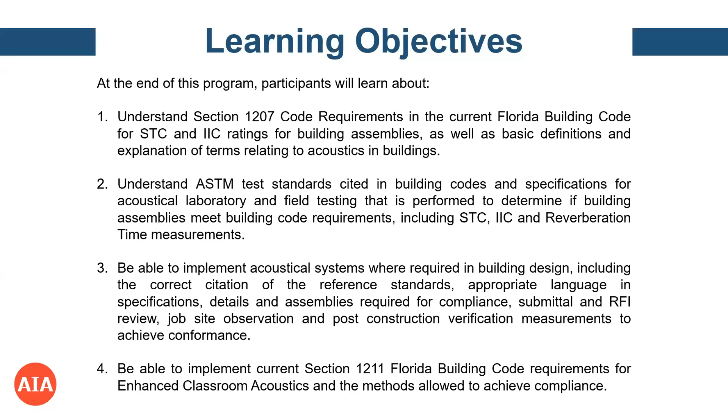So here we're actually going to start and look into section 1207 of the Florida Building Code. This is going to be our STC and IIC requirements that you may actually be a little familiar with or have seen before.

As we go through this next slide, we just want to look at the summary here. We have two different types of sound that we're dealing with: airborne sound and structure-borne sound. Airborne sound is what we think of when we think of a TV or a speaker, versus structure-borne sound, which is impact noise - somebody walking on the floor above, or dragging a chair or table. Those are the types of things we're going to be looking at for structure-borne or impact sounds.

With STC and IIC, the summary is STC 50 and IIC 50 in the lab, and a 45 rating in the field. For the field ratings, these are actually going to be called NNIC and AIIC for the specific metric, and we'll get into that a little bit later.

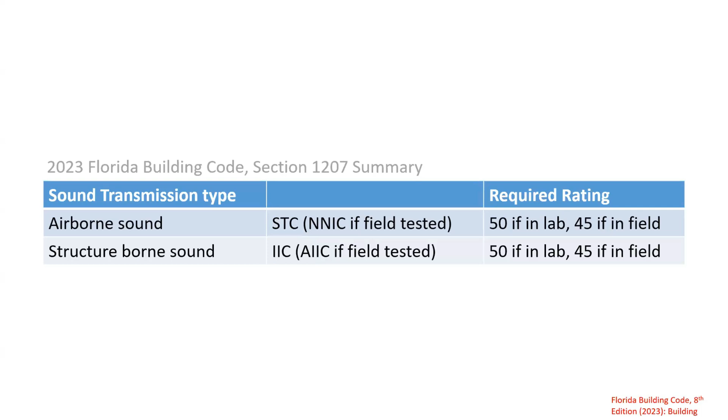So what does this code actually apply to? It's the walls and floor-ceiling assemblies of dwelling units and sleeping units. A dwelling unit is kind of your typical condo or apartment. You need to have the provisions for living, sleeping, eating, cooking, and sanitation, all of that.

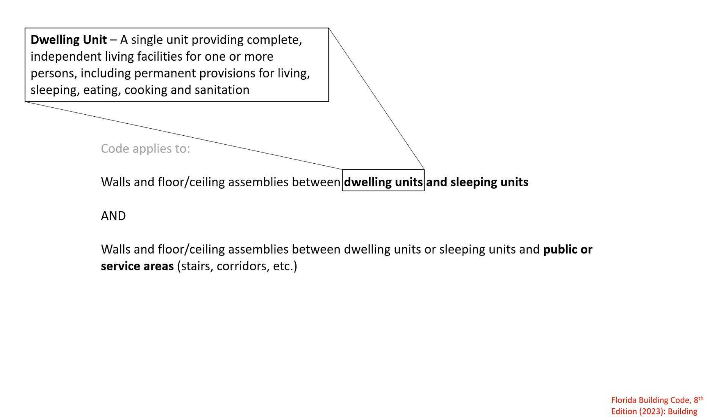Whereas a sleeping unit is going to be more like a hotel room or a motel room. The definition doesn't require quite every one of those facilities. But a sleeping room or a room within a dwelling unit is not in itself a sleeping unit. So if you have a bedroom in an apartment, that might be similar to a hotel room, but it's not its own sleeping unit - it's still just part of the larger dwelling unit.

So you don't need to look at the walls for the code requirement between different rooms in an apartment or condo. The walls and floor-ceiling assemblies between dwelling units, sleeping units, and public or service areas are also required to meet this criteria. This applies to amenity spaces you might have, whether it's a gym in your hotel or a mechanical room - these all still require this, even just to the corridors or breezeways.

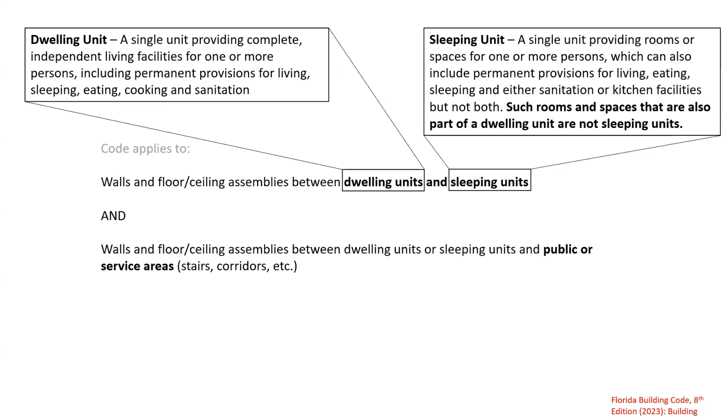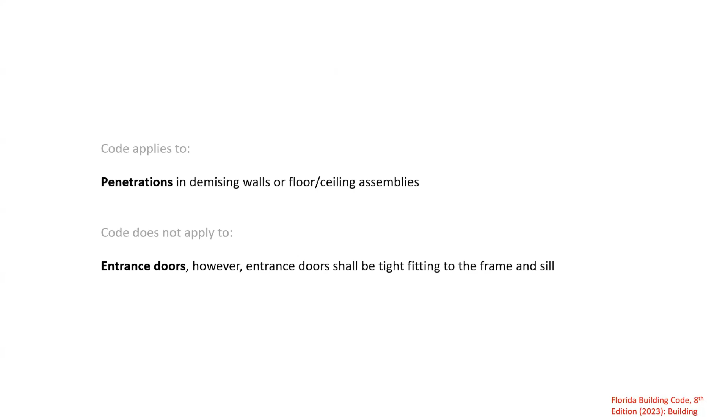It will also require us to look at the penetrations of these assemblies - so outlets or plumbing penetrations have to be made sure they maintain this criteria. The code, however, does not apply to entrance doors, so you don't need an STC rated door. However, it does state that you have to have a tight fitting door, tight to the frame and sill.

So we're going to go ahead and look at a little bit of the history of how this code has changed in Florida over the years. Starting with the 2004 Florida Building Code, when it was first introduced into the code in its current format, still the same section 1207.

At this time, it only applied to dwelling units, not sleeping units. The criteria was still STC and IIC 50 in the lab and 45 in the field - as we saw in that summary, it's still that same criteria. It called for ASTM E90 for airborne sound and ASTM E492 for the measurements of structure-borne sound.

Then in 2010, they added the provision that masonry can either be tested in accordance with ASTM E90, or you can actually calculate it using the Masonry Society's standard TMS 0302. We'll go through an example calculation of this shortly.

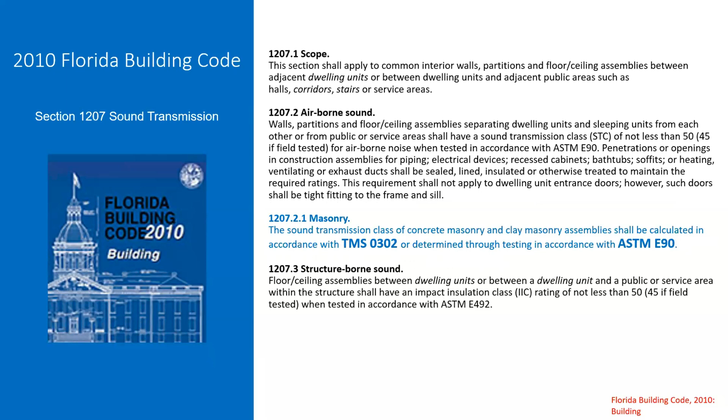Then the next change happened in 2017 when sleeping units were added into the code. So this is when hotel rooms, motel rooms, and things like that started to be required to follow this code - not just your typical apartments and condos that most people were focused on before. Otherwise, the rest of the changes were just to make it fit for adding in the sleeping units, not just dwelling units.

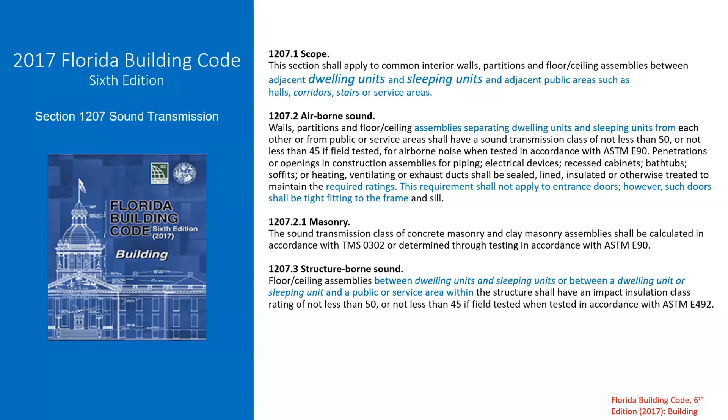Then in 2020, an engineering analysis was allowed in the code for airborne sound or structure-borne sound, rather than just the tested metrics of the field test or lab test. That was the addition in 2020.

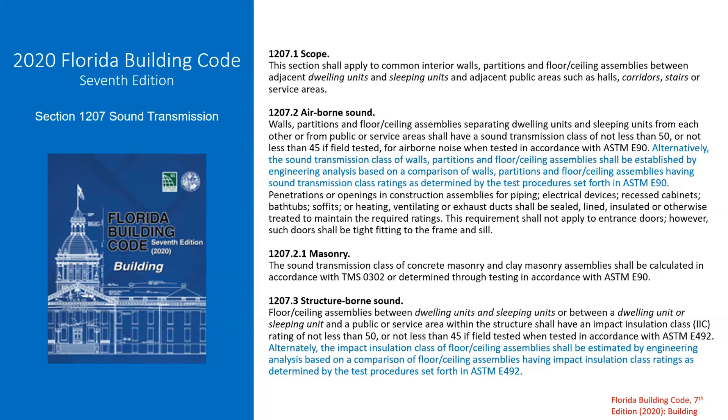And now we come to our current code, the 2023 Florida Building Code. The one thing that changed here is that all those previous times, it just said the lab test and field test, STC and IIC. Well, the metrics for a field test are actually called something different besides STC and IIC.

And there are 3 possible metrics for each of them, and they did not previously say which of the 3 you had to meet. So now they have specified what metric you can meet, because we were having people who might have a field test and could meet one but not another - so it's, well, do they meet the code or not if they're meeting one metric for field measurements versus another?

In this case, it's the normalized noise isolation class, or NNIC, for airborne sound - that's the field metric they're looking for, in comparison to the STC as the lab test. And for impact sound, instead of the IIC as the lab test, it is now the apparent impact insulation class, or AIIC, that is required to be met if you're looking at the field metric.

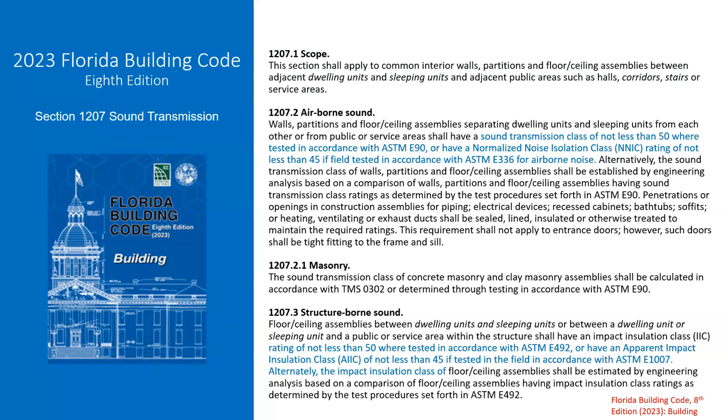As well as the standard building code, we also have the residential code in Florida. It's very similar, but it's an optional appendix, so it's not mandatory unless adopted by local ordinance. The ratings, instead of 50 in the lab and 45 in the field, are 45 in the lab and 42 in the field. This uses the same NNIC for airborne sound in the field metrics, but for structure-borne sound it uses the normalized impact sound rating, or NISR.

As we look at the reference standards in the residential code, we can see the years associated with these. The lab tests here, ASTM E90 and E492, have the last 2 digits after them showing the years those standards were adopted by ASTM. They've been modified since, but the reference standard for the Florida Building Code in this case is 2004 and 2009.

So we're seeing about 15 or 20 years old is how old they want us to look at. But we actually see test reports all the time from somebody who tested their wall or assembly or flooring assembly with underlayments, in some cases, more than 20 years ago—maybe 35 years ago. We might start to look at whether it needs a more recent test of that product, because over the years things have changed in how we test, and the quality of testing itself has changed with our instrumentation.

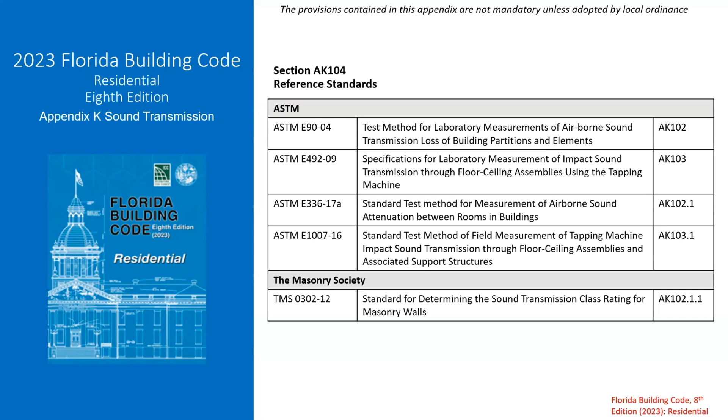So now we mention the Masonry Society standard 0302 for calculating the STC rating instead of doing a test. They give you different equations. Here we have for clay masonry at the top, and then concrete masonry, these two sets of equations. This is based off of the average assembly weight.

This is the surface weight of everything included in the wall, from the weight of the actual units themselves, any plaster, stucco, paint, grout, mortar—all of it, if the voids are filled, goes into it. But if there's gypsum board on the walls, that's not part of this weight. It's just the assembly of the masonry and the associated items for that.

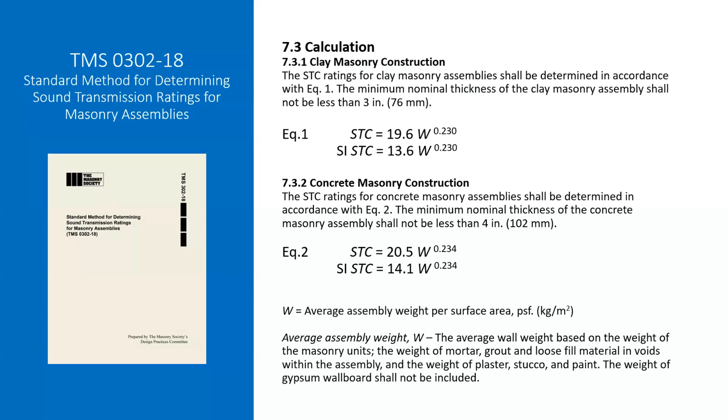There are calculations to include additional gypsum board in this and other equations. Actually, we're starting to see some of these equations to add gypsum board are based only for concrete masonry. They don't actually have it for clay masonry.

This is based off of 1/2 inch or 5/8 inch thick gypsum board. There are a couple of different equations, whether it's on one side or both sides of the wall assembly, and whether or not there's sound absorbent material inside the cavity or no sound absorbent material in those cavities.

So the things we're looking at here are the thickness of that cavity space or furring space between the block wall and the gypsum board. If you have 2x furring on the wall, that's going to be 1.5 inch space. If it's 1x, maybe you have that 3/4 inch space. Then it would be these equations here, whether it's on one or both sides with no sound absorbent material.

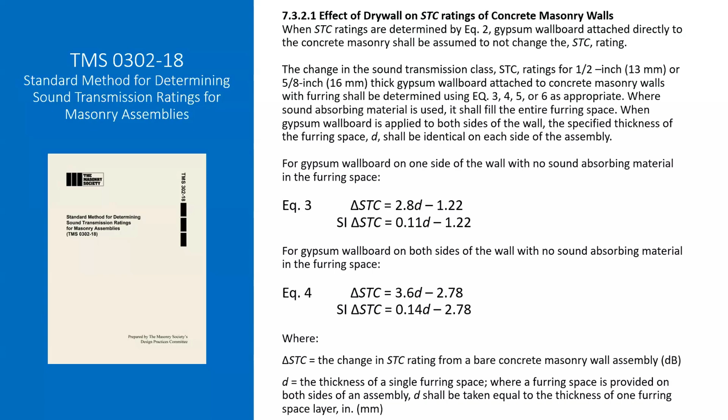On this next slide, we have the equations for if it does have sound absorbent material, like fiberglass batt insulation, inside that cavity.

You can also do multi-wythe masonry construction by doing the composite assembly, or the total weight of all of the wythes, using one of those first equations—1 or 2, whether it's concrete or clay masonry. Those first couple of equations look at that weight based on the entire assembly for both wythes or multiple wythes, if more than 2 even.

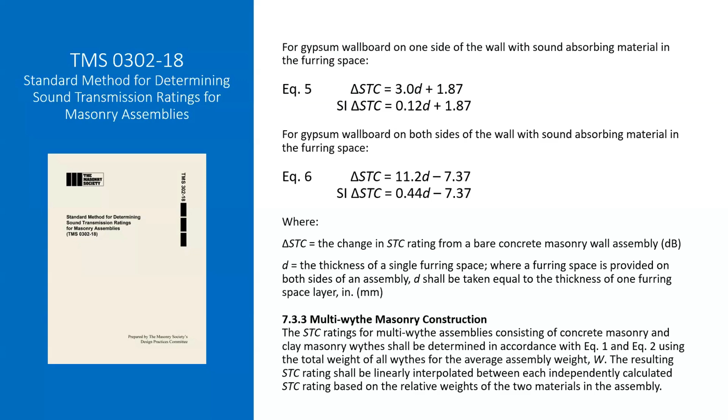So we're going to go ahead and take an example calculation here. We've got our 8-inch nominal block at 41 pounds per square foot, which is about a typical normal weight block. Next slide.

So we find our equation. This is the equation for concrete block. And we also have our equation down here for adding gypsum board on one side of this with a 1.5 inch airspace. So say we have 2x furring and some fiberglass batts in the cavity.

Next slide. So we take our 41 pounds per square foot and add that into our equation, and then we calculate that out. Next. So just our block itself gets about that 48.9 STC rating.

So now when we look through the next side of the equation, adding the gypsum board, we take our dimension here, our 1.5 inches, and we solve out this side of the equation. That's our delta rating, and this is going to give us an increase of 6.4. So then we take both of these and add them together, and we get our rating for our wall of 55.3, or in this case, STC 55.

So taking this normal weight block and adding furring on one side with batt insulation and gypsum board, we could use this wall, but we couldn't use the wall without this furring because we weren't quite meeting the 50.

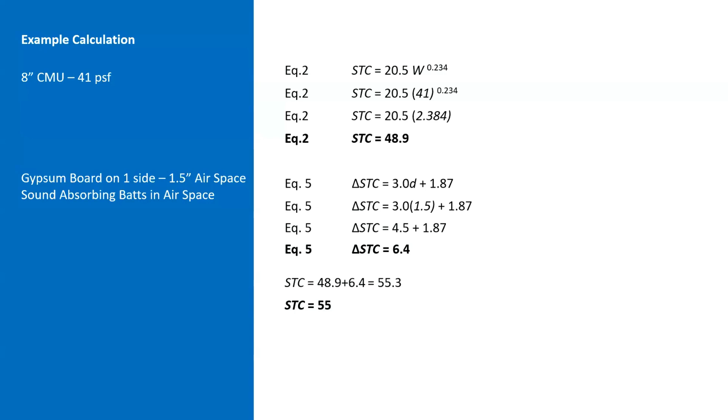Thanks, Matt. So Matt's been talking about STC, and we're going to zoom out a little bit more now and look at some other aspects of it.

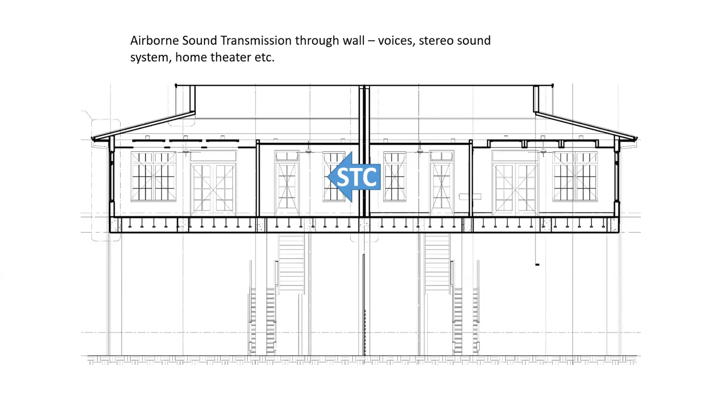Maybe something to consider might be the fact that we also get sounds that flank through the ceiling, over the wall, and back into the other unit. Same sort of path here through the doors. Sounds can leak under the floor ceiling assemblies if they're elevated, like shown here.

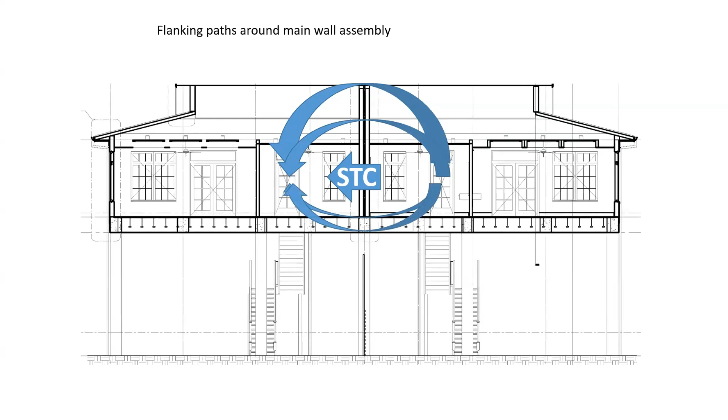And so what ends up happening, even through windows, is that you have a space that you're trying to look at and analyze the STC rating of. We may think of just the wall, but in reality, and I'm not sure if you can see my pointer, hopefully you can, we really need to be looking at all of these sound paths. In acoustics, these are what are called flanking sound paths.

Anywhere where there's a joint or a juncture between two planes, we need to take a look at that, because if we have a nice, robust wall between two spaces, well, that's great. But if we don't look at all of the details where these come together, then you could have flanking sound go right through those areas of least resistance.

And sometimes the flanking noise can decrease the STC performance by 5 or even 10 points. So you may think that you have an assembly that meets building code, but if it's in a certain situation like this, where there are many, many paths of potential flanking, you could be out of compliance if you did field testing.

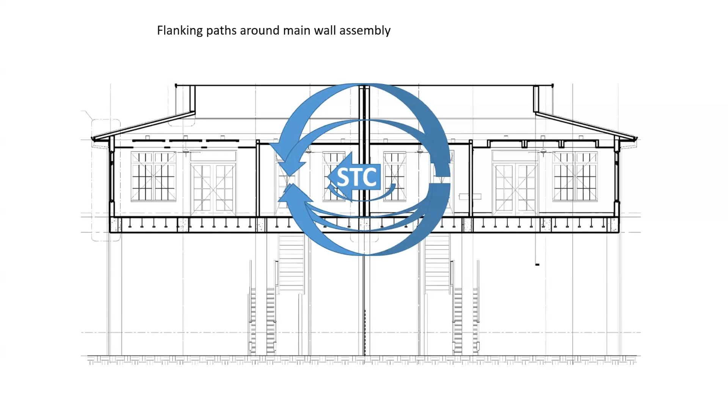So this is just to get you thinking about the idea that STC is not just in one dimension or two dimensions. When we think about STC, we really need to be thinking about the entire box, the entire structure of the floor, the walls, the ceiling, so that we're addressing all of these potential paths that could decrease our performance.

When we look at STC, what is STC? Well, it's basically a single number rating system of how well a building partition reduces sound from one side to the other. And it takes into account sounds that range from 125 hertz to 4,000 hertz.

But if we think about this in terms of human hearing, human ears hear from about 20 hertz to 20,000 hertz. So what the STC rating really is doing is looking at the frequencies that are more in the middle to middle-higher range, but it's not looking at the very high and it's not looking at the very low. That's something to keep in mind as you start to think about this and as you're comparing one assembly to another. You could have numbers that appear to be similar, but they could have very different acoustic performance.

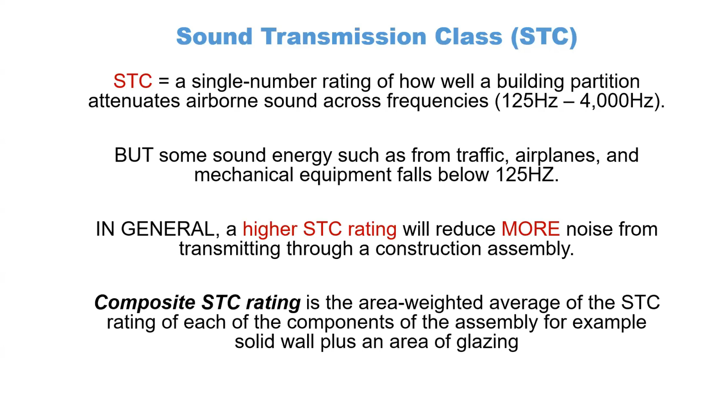We also look at the concept of composite STC ratings, where basically if you have an entire wall that has a door and a window and a wall structure, you're going to have separate STC ratings for each of those components. But you can also calculate a composite STC rating of the entire structure that allows you to account for the area of the wall, the area of the window, and the area of the door, so that you can more effectively understand how your full assembly might work.

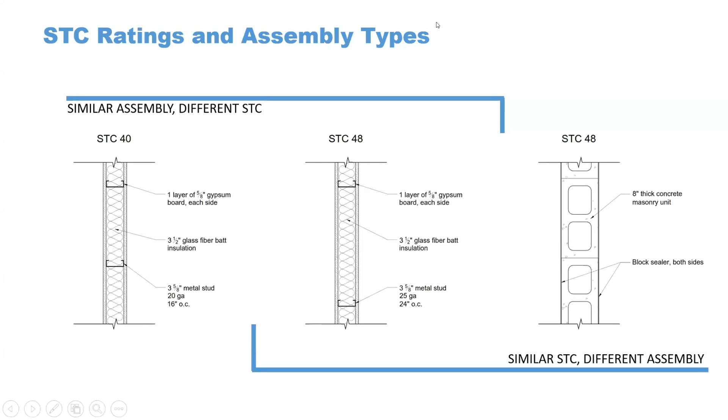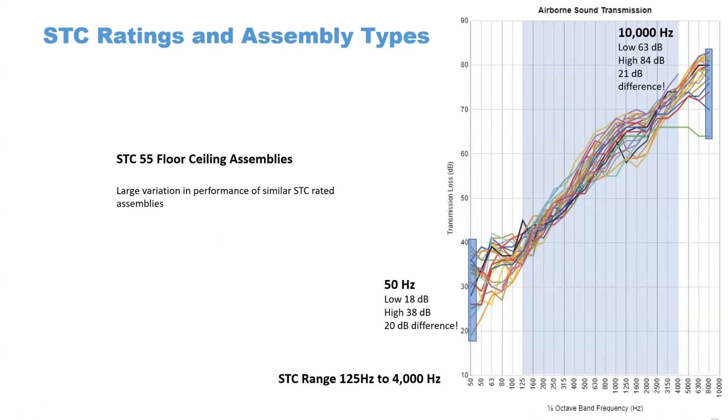So looking at how STC is actually tested, we've got a way that ASTM describes in standard E90, where you have the setup in a lab, and we test for sound transmission in a lab.

But you can also do this in the field, and this is commonly done. The standard that governs that is ASTM E336. That is done many times in multifamily housing. If there's any question about building code compliance or whatnot that comes up, these can be done in the field so that you can actually measure the acoustic performance of a building.

When we do this testing, we start off and have a sound source in one room, we call it the source room. The sound source is played at a high level, usually around 100 dB or so, and it is measured in the source room so that you know exactly how loud the sound is there. Then we also measure in the receiving room, with multiple measurement locations, so that you are able to get an average sound level of how much sound is being reduced by the assembly you are trying to test.

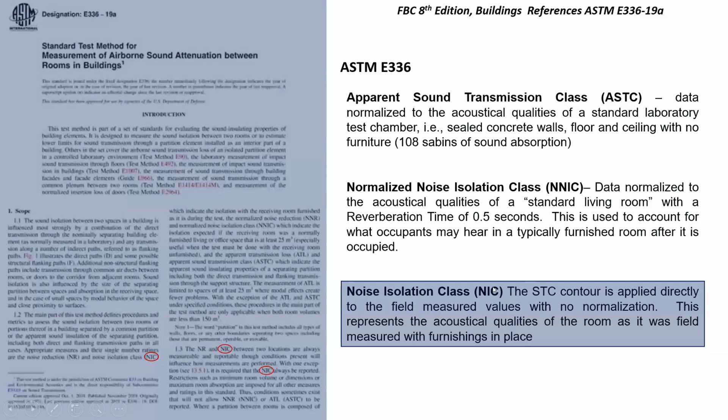Exactly. And like Matt was saying, anecdotally we have seen a number of cases where if we're kind of borderline with one or more of these in the field, one may be over the requirement for the building code and one may be under. There have been a number of cases we've been involved with where, when you're straddling this line of whether you were in compliance or not, it was difficult before because none of these were actually specified. Now it's specified, now it's the NIC, so it makes things a little more clear cut.

And just to hit the point home, we want to make sure that the STC is not confused with an IIC. An IIC is impact insulation class, that's for impact sounds. But it is not the same thing as sound transmission class, because sound transmission class is airborne.

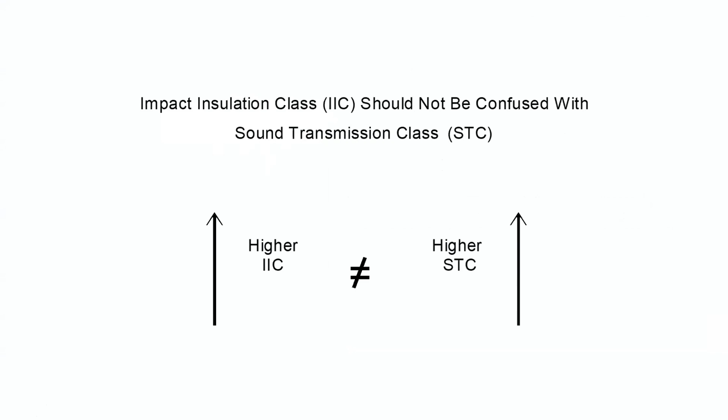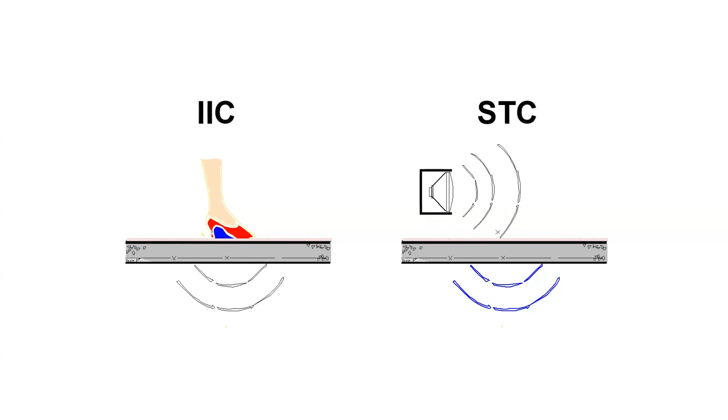Just a visual here, STC is airborne. So airborne sound coming from a speaker goes through the building assembly and radiates down into the room below. Whereas impact sounds come from the impact of a heel or of furniture scraping the floor, and that sound is radiated through the building structure and is heard audibly below. Different types of sounds, and they are measured differently in the building code and in acoustics in general.

So we're going to talk a little bit more. Matt's going to take it over, and he's going to talk a little bit about the impact insulation class.

So as Keely was just saying, and we've mentioned a little bit before, the IIC, or impact insulation class, as it states in the name, is impact noises, impact sounds. So whether this is somebody walking across the floor, kids upstairs running around, moving some furniture and it's dragging a bit, you drop things in your kitchen, a plate or a pot or pan, things like that—these are the types of sounds that cause impact sounds. Airborne sounds are sounds that start in the air and then hit the building surfaces, whereas impact sounds start as something impacts into that building surface.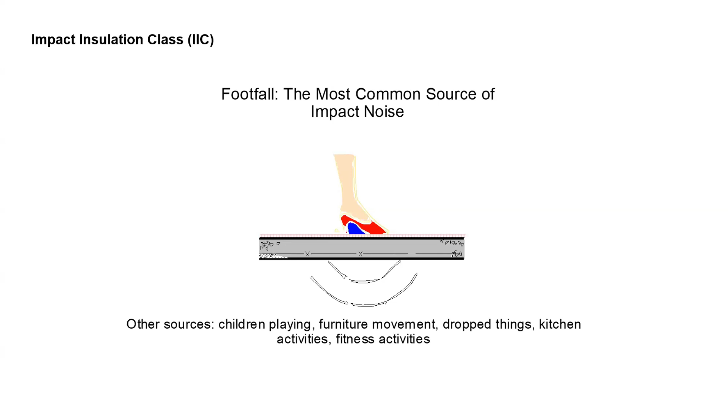A higher IIC number will mean that there is a lower amount of impact sound that is transmitted. So we have less sound being transmitted into the space below, and this gives us a higher IIC. A higher IIC is typically preferred in this case, it's an improvement in performance.

Similar to the STC, we can see here a variety of floor assemblies that have, in this case, an IIC of 55, and we have again a wide range of sound levels here. In the low frequency, we're looking at a 25 decibel difference in some frequencies, and in the high frequency, as much as 35 decibels in some of these cases. This range is slightly shifted, it's actually moved a third octave band down from what the STC criteria is, so this goes from 100 hertz to 3150 hertz.

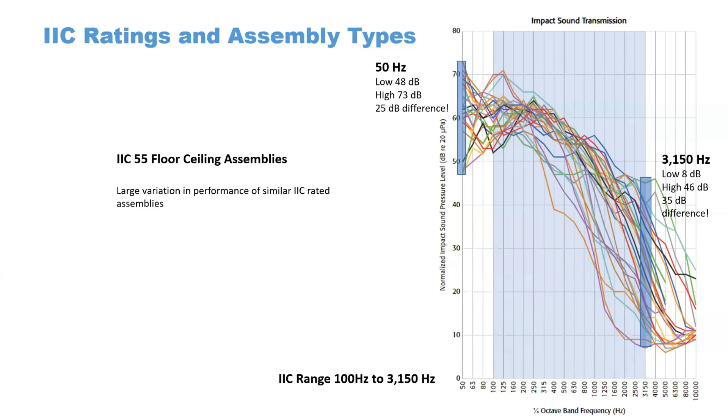Similar to the STC, we have our lab test and our field test. Our lab test in this case, you can see this concrete room with a floor in the middle of it, and this machine sitting on the floor is called a tapping machine. We'll explain more about the machine later, but the standard test method for the lab is ASTM E492. And for the field, again same machine, but we're out in the field and we have the standard ASTM E1007.

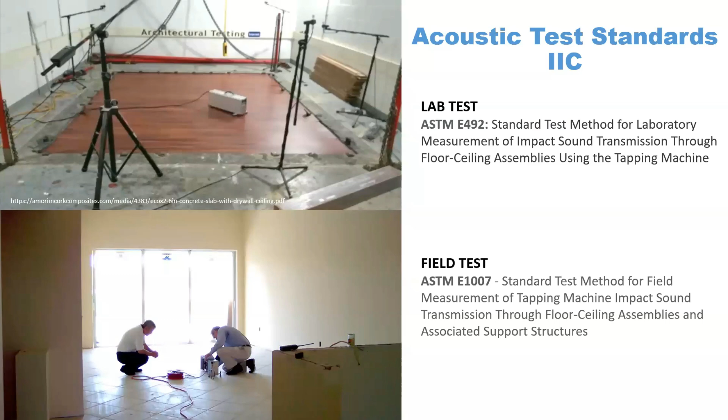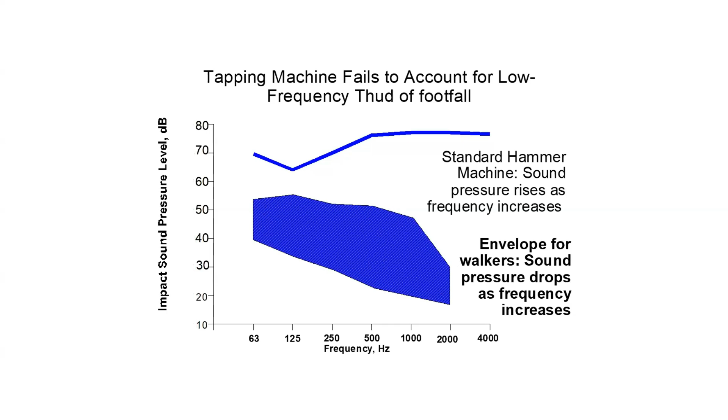The tapping machine doesn't actually mimic the sound of a human foot. It's not meant to be the same as a footfall. We can see here that the hammers hitting the floor from the tapping machine create this line above, and the sound pressure rises as frequency increases. Whereas this larger shaded blue area below is more what we see for an actual human walker on this space. As frequency increases, the sound pressure level decreases in this case, and we see a decent bit of change between them.

The yellow or orange color here is an IIC between 43 and 45 for the floor ceiling assembly, and the blue is about a 52 or 55. So they're about a 10 IIC point difference, and we can see the sound levels between them are about 10 decibels different as well, which is heard as twice as loud.

Now the ambient sound level we're seeing down here, and actually this isn't from the tapping machine, these are footfalls from somebody actually walking on these different floor assemblies. The ambient sound level, kind of the bottom of these peaks where sound would be if someone wasn't walking, we're still seeing, even with the IIC of 52 or 55 which is above code minimum, stuff that's 10 or 15 decibels above that. So that's noticeably louder, actually twice as loud to three times as loud as when there's not someone walking on that floor assembly. This is something someone would just notice, someone walking above, even if you're doing better than code minimum in this case.

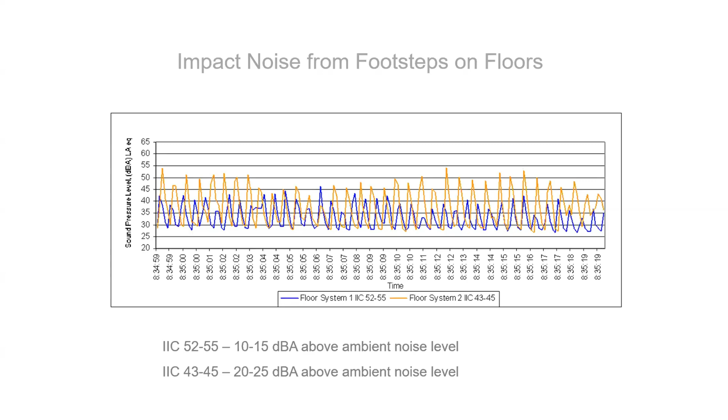Exactly. Code minimum does not mean inaudible. It does not mean soundproof. It just means you're meeting the code minimum. And many of the luxury or ultra luxury residences we work on for multifamily go above and beyond code minimum, very much so. And soundproof is not a term you probably want to use in any of these, depending upon what sounds -- there's all sorts of things.

We mentioned the tapping machine, and this is kind of an image of what that is. There are five hammerheads, basically steel hammers on a camshaft that rotates so there is a rate of fall of 10 impacts per second. As we said, this is not anything close to what a person walking would be. It's meant to be loud enough that we can hear it below even in larger assemblies, or assemblies that perform better. We still want to be able to hear these impacts through those so we can measure how well it performs. So this is an even larger impact than what you might normally have -- if you're having this happen all the time on your floor, there might be other issues.

But this is used both in the lab test and the field test. It's the same piece of equipment that's used for either.

So we take the tapping machine and it's put typically on the upper floor, and then the measurements are taken down below in the receiving room. In this case you don't actually have a sound level measurement on the upper floor because it's a set kind of impact, a set rate of fall. It's meant to create a standardized impact, so you're only actually measuring it in the receiver room. The receiving room can be, and is typically, worse when it's directly below -- that's typically your worst case scenario.

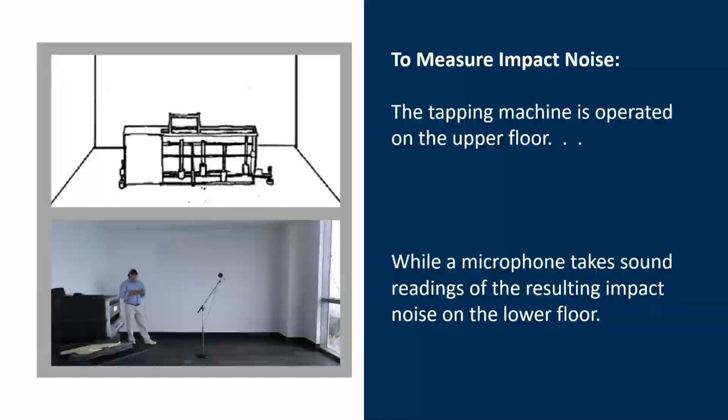So we're going to look at something very similar to the STC, which is the IIC. This has three metrics, and this is for field measures. First off, we have the apparent impact insulation class, which similarly is sealed concrete walls, no furniture. It's meant to normalize this to be similar to the lab test chamber.

Then we go to the next one, the NISR, the normalized impact sound rating. This is normalized to the standardized living room with a half-second reverberation time. While we said that for STC this normalized, middle metric was the one that code requires, for impact sound Florida has decided to use the AIIC, the first one we talked about, as its code requirement.

This does differ from the International Code Council's criteria. So the Florida Building Code and the International Building Code do differ on this, if you are working in other states or other jurisdictions as well.

And then third is the ISR. Again, this is just the levels exactly as they were measured. It's not adjusting for any reverberation time in the room, it's just how that specific room performs.

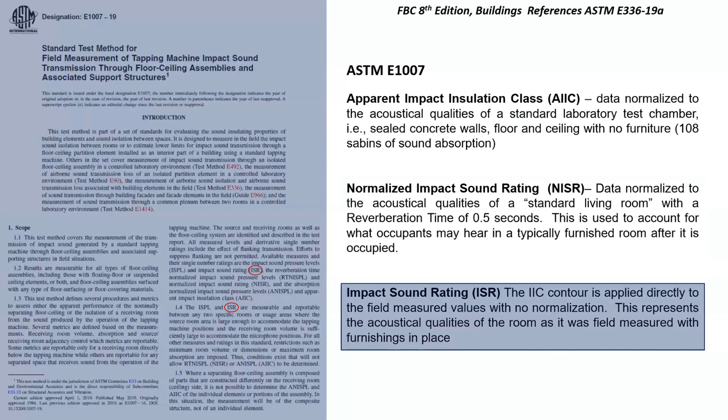We talked about some adjustments that have to be made typically for absorption in the room, but there are other reasons why we may have to make adjustments to a room. One of those is also the ambient noise or background sound level when we do measurements, and this is for both airborne sound and impact sound.

We want our receiving room levels from whatever source we're trying to measure to be at least 10 decibels above the ambient sound. If not, if it's closer than that, then we have to apply correction factors. And if it does have correction factors, that can limit how much performance we can state that assembly has, because we can only measure up to that performance.

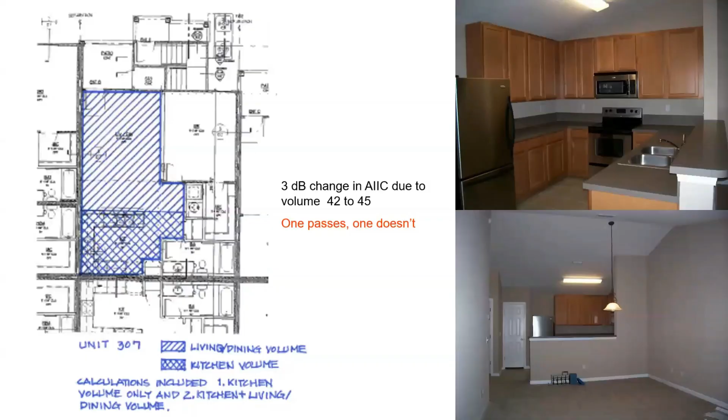As well, we have what's called coupled volumes. We were talking about these minimum and maximum volume requirements. Well, what if we have a space like this and we're looking to test the tile floor in this kitchen down to the unit below? Now we've got a relatively large volume there. Are we looking at just the kitchen volume, or the whole great room volume? This is a real scenario we've had.

One of these volumes, based on it and the adjustments needed, would pass the criteria just at 45 per the building code, and one of them did not, and was actually 3 decibels lower, or 3 IIC points lower. So in some scenarios it really is about trying to find out what volume to use, what's that coupled volume. The ASTM standard does call out typical spaces for coupled volumes, whether they are or aren't, based on certain dimension requirements and relationships to the space. But not everything is as clear cut in the field as the standard suggests.

So a quick summary of some design criteria as well, and the various code requirements. We've talked before, the STC and IIC 50 for a lab test is in the Florida Building Code 8th edition. It's also in the International Building Code at the same level.

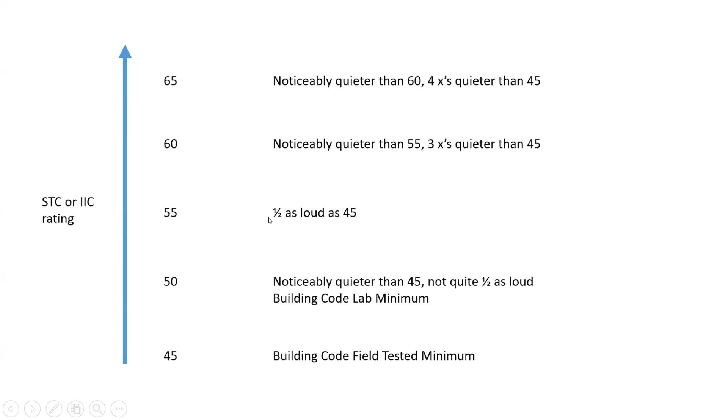Again, just because you meet code doesn't mean people don't complain or still hear this. Based on a study, if you're at an IIC of 30 to 40, which is lower than code, a lot of people are hearing the footsteps above and are bothered by them. If we go over to 50 to 60—meeting code up to the edge of the acceptable/preferred recommendations from the ICC guideline for acoustics—still about 30% of people are hearing those footsteps above from these assemblies.

About 8% or so are still bothered by them. As we go higher and higher, we still have people who hear these and who are still bothered. Code minimum is good to know, and sometimes that's what you've got to work to, but it is not recommended—you will still get complaints. It's just good to know people are still bothered by these, and sound is one of the biggest complaints you can see in multifamily housing.

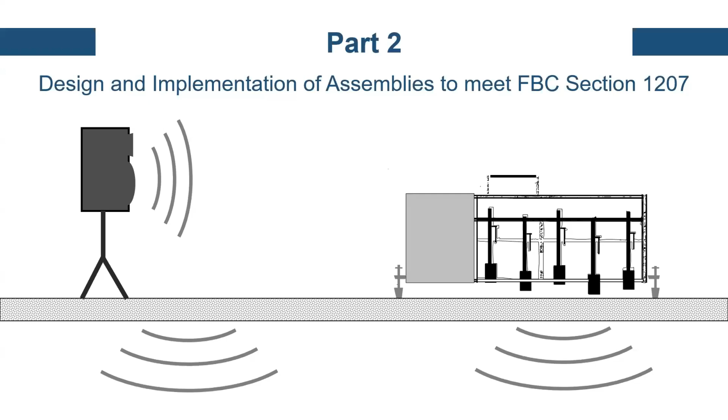So part 2, we're going to look at the design and implementation of assemblies to meet the Florida Building Code, and how they can get implemented in projects. So what are ways that you can achieve a higher IIC? Well, one way we just mentioned is, of course, carpeting. Though not every space can be carpeted, and most of the time nowadays, especially in residential, people are not wanting to necessarily go the carpeting route anymore. However, it does do a good job at improving the IIC.

And nowadays with all of these condos changing out carpet for other types of hard reflective material, there are issues. So what are some other ways that we can deal with it?

Well, one is floating floors. Floating floors can help to increase the IIC performance, but they can get a little costly. They do take up a lot of space. And if you have a renovation, it can be kind of difficult to accommodate a floating floor, although they are very effective. Floating floors are typically used in places that need...

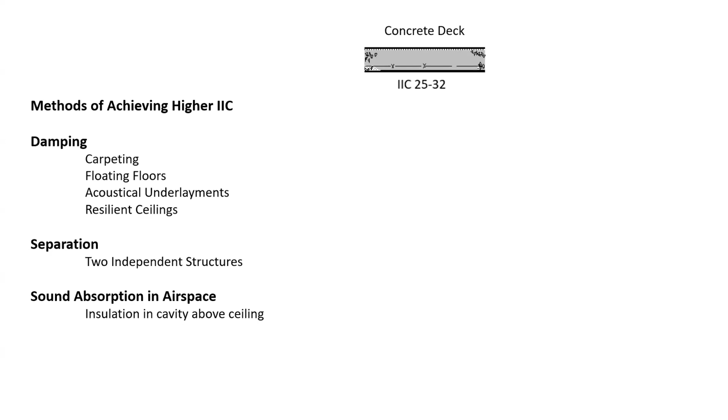Oh, thank you, I forgot about that. Sorry, floating floor - I forgot to advance the slides.

Floating floors like this - again, when we're talking floating floors here, we're talking usually these thicker concrete floated floors or a multi-layer plywood build up on top of resilient isolators. This isn't just your typical laminate floor or vinyl floor installed as a floating installation - though that does still have some minor improvements. These are something you might see more around a fitness center or a mechanical room, or in a recording studio, someplace where there's sensitive acoustics.

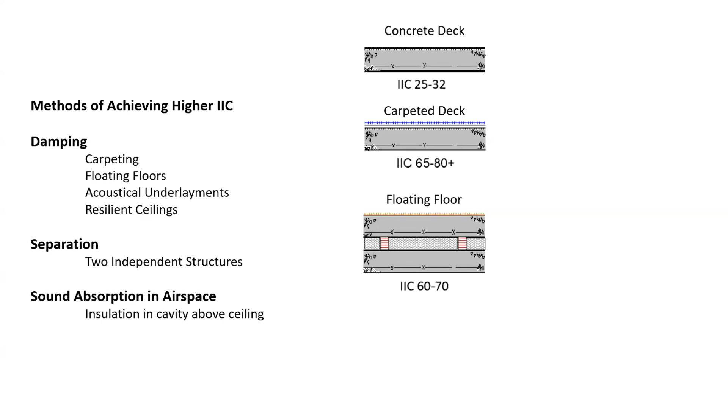And even with this, we can see that the IIC rating is getting close to, but not even always where carpet can be, because of how the IIC tests are performed. Carpet does perform very well based on the frequencies that it's at as well - even if you might still hear somebody's foot on the carpet, you might not hear it with a concrete floated floor. And again, as Keely was saying, we can't have carpet just everywhere, even if we want to.

I mean, I don't know anyone really that wants carpet in their bathroom per se - not anymore. So you're going to have a hard surface floor in something like this at times. So we do need to look at other options like these.

What we see is very common is tile underlayments. Whether it's for tile or for other hard surface floors like wood floors or luxury vinyl floors, we see both these very thin underlayments and the kind of thicker underlayments. The thin underlayments might be only a few mil - I think some are 90 mils thick, and a mil is a thousandth of an inch. Versus these thicker underlayments, we're looking at greater than a quarter inch - a quarter inch, a half inch underlayment for some of these thicker ones, depending upon the finish and the rating that we're trying to get and the base assembly.

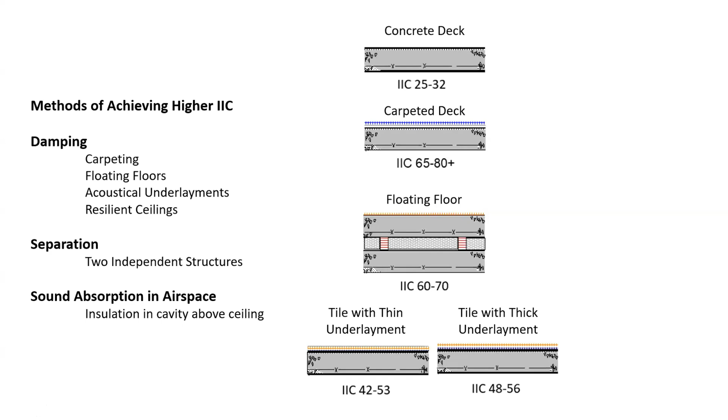All of these values being shown here are based on the concrete slab assembly, which is what's in Florida. We see a lot of these in condos and in hotels, these concrete slab assemblies, so it's something we see a lot more of. But the concepts still work for wood assemblies, though the values would differ.

So, moving on to other ways of helping achieve higher IICs are resilient ceilings. Whether we use a system that includes a wire tie, or if we use special acoustic isolators, we can get varying degrees of acoustic performance just from having a suspended ceiling below the slab. It's a very significant way to improve the acoustic performance, and an option that many people look at.

Then we can layer these systems and take a concrete slab and have the acoustic spring hung ceiling, and then also either thin underlayment and tile or thick underlayment. So you can improve even further the acoustic performance by layering the acoustic systems.

You have to be careful because each of these systems has an IIC rating in and of itself. And when you start layering them together, they are not additive, meaning the IIC ratings are for an assembly as a whole.

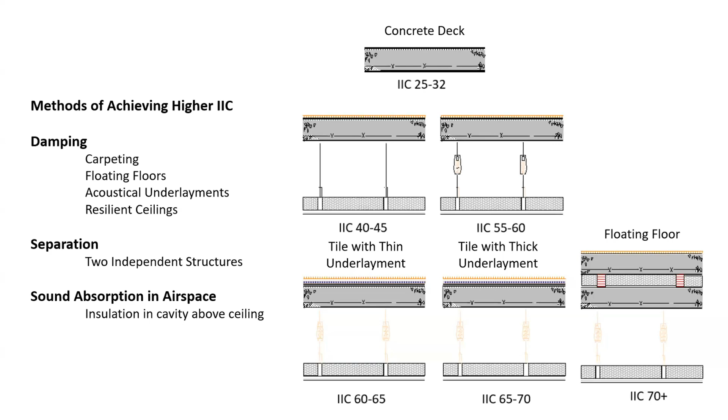Insulation in those cavities is also preferred to help improve these values. Some of these things can help with both the STC and IIC, like the sound isolation ceilings, but the tile floor underlayments or hard surface floor underlayments won't necessarily help with your STC rating, but they will with the IIC. Another thing we need to look at is how the little details occur, where the junctions are in this case.

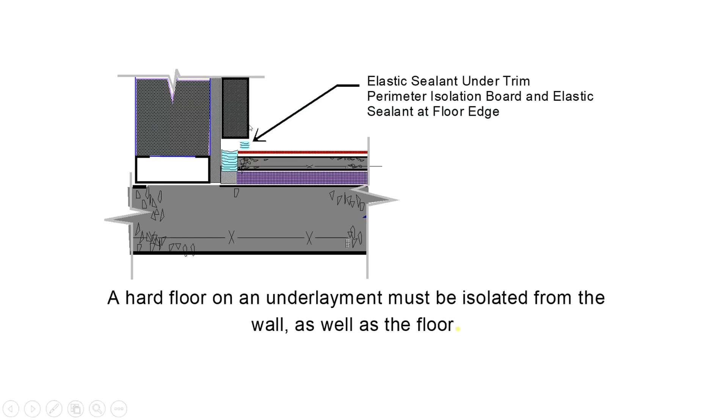So in this case, if we have the hard surface floor on, say, an underlayment, we're going to look at the sealant at the edge of the wall and under the baseboard. We want to make sure that all of the acoustic systems are resiliently isolated from each other, because if these components were touching each other, they would allow for structure-borne vibration to occur. That's why the floor isn't touching the wall, isn't touching the gypboard. All of these pieces have to be structurally isolated from each other so that you get those resilient layers to help dampen some of that structure-borne vibration that gets into the assemblies.

So let's say we've got two different underlayments, we're going to call it underlayment XYZ and underlayment ABC. We have an IIC rating of 50 to 55 with the one, but it seems to be a little more costly. Another we see has an IIC rating of 60 to 70, but seems to be a bit more affordable of an option. I probably can't really see this when I ask this question, but how many of you would go with underlayment XYZ over underlayment ABC?

Well, now if we look at a little more information, we see how these two underlayments were tested. Underlayment XYZ here was tested just on the bare concrete slab and got that 50 to 55. Whereas ABC was tested with a full spring hung ceiling system below to get this higher rating. That might help explain why we're seeing some differences, and you can't really just compare these apples to apples because they're not apples to apples in this case. So it's one of those things that has to be looked into, the claim from the manufacturer that my underlayment gets this rating has to be examined further to see if you're really getting what you need. Again, it's the assembly as a whole that is rated, not a product.

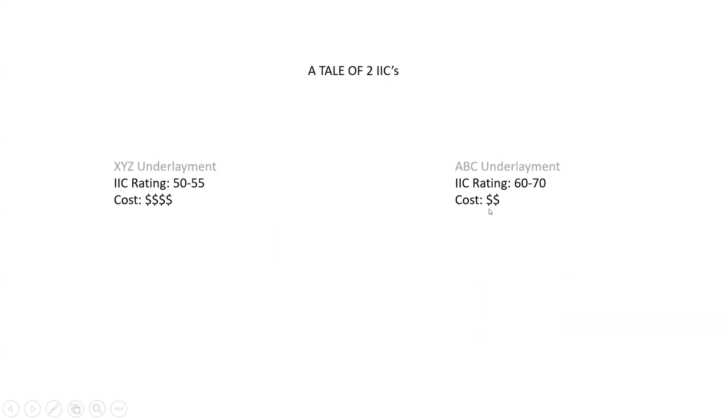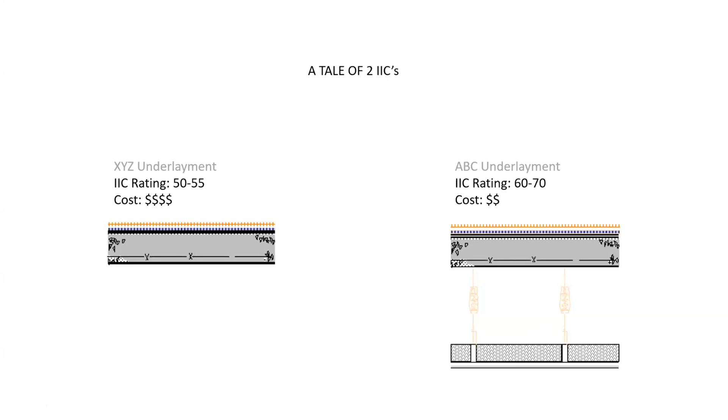This may seem kind of far-fetched, like we've got these two underlayments, one really expensive and one not. But the way they're tested, one of them has a complete isolated ceiling, where the ceiling is doing a lot of the heavy lifting and is the reason why the IIC rating is so high. You wouldn't necessarily know that just from looking at the IIC ratings when one is 70 and one is 55. So just something to think about, be aware of, that this has to be looked at when you're looking at the actual acoustic performance of various underlayments.

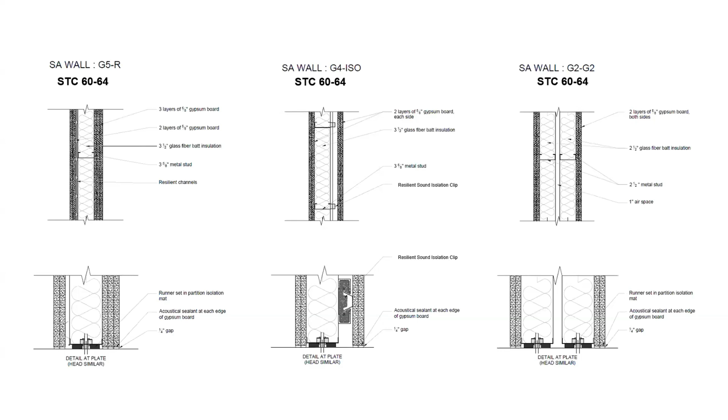And again, with block wall, we've talked about this kind of nominal 8-inch block wall before. It's in that mid 40s range, the 44 to 48, depending on the weight of the block that you have. But if we take that same wall, add a little bit of an airspace and separate framing, just insulation - it can be just glass fiber batt insulation, 1 layer of gypboard - we're up to 60 to 65 as our STC rating. So it's a big improvement.

It's again similar to those double stud wall and isolation clip walls we were just looking at for the STC rating. But again, because of that mass from the block and the masonry, we're going to reduce more low frequency sound in this case. And at least in this case, we have on one side a gypboard finish, if that's what we're looking for.

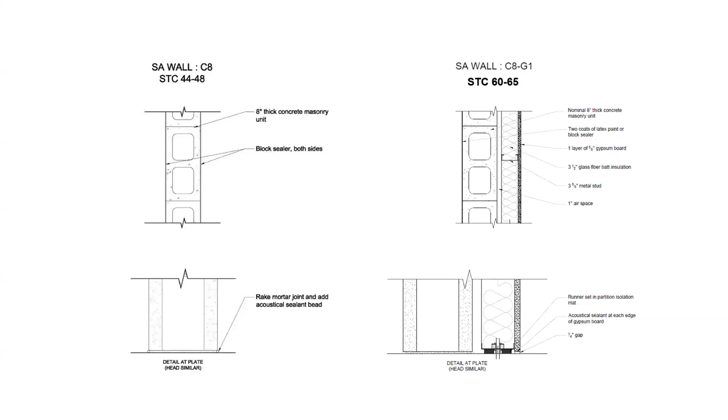So, when we're looking at all this, you might think, well, there ought to be a standard. Well, there actually is a standard. But just a couple of things to think about: you can't necessarily rely on just the manufacturer's cut sheets or websites with just the single line IIC test result. You want to try to dig a little deeper if possible and get the full acoustic test report, and make sure that it is done by an accredited lab.

And make sure that it's the full document. We'll go over a little bit more on this. But there are some things we have seen - sometimes information sent from a manufacturer has multiple pages from different labs. Back in the olden days, I have actually seen whiteout on some test reports. You don't see that too much these days, but there can be fudging of numbers.

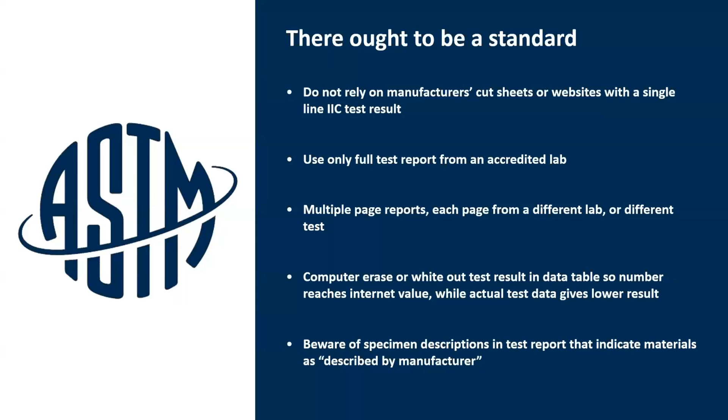So it's just something to be aware of. Many manufacturers test in accordance with the standards and will happily provide you with acoustic test reports, because they know that people who work in capacities such as ourselves will ask for it to review and verify it. But just be aware that there's the possibility these things can be a little difficult to understand or misleading in ways.

So, how to tell if the IIC is what you will get. We want to request the product data page, but then you also want to request the full acoustic test report. You don't want just the summary page, you want the full report. The full report will actually say page 1 of however many pages there are. They are supposed to be reproduced in full, meaning they're not supposed to give just one page of the test report. You should get page 1 of 4, page 2 of 4, page 3 of 4, and page 4 of 4.

The test report should be from an accredited lab, and there should also be the exact building assembly listed - meaning what was the finished floor, what was the underlayment, what were the adhesives used, mortar, grout, was there a floor-ceiling assembly. Then you need to take that acoustic test report and compare it to what you want to build - is it the exact same assembly? If it is, you're good to go. If it's vastly different, or even somewhat different, it's going to be difficult to use the test report unless it's the exact same assembly you'd like to use.

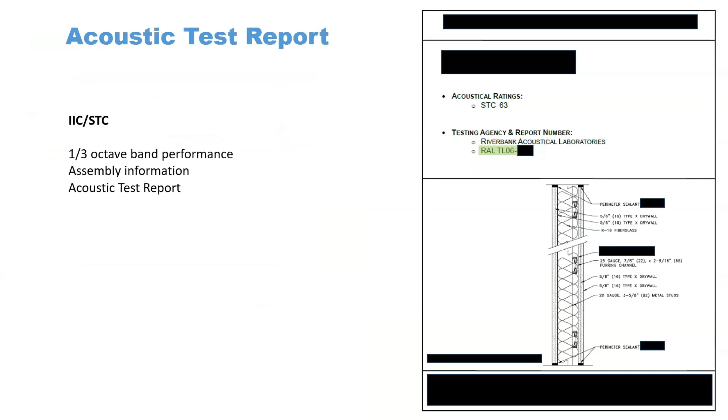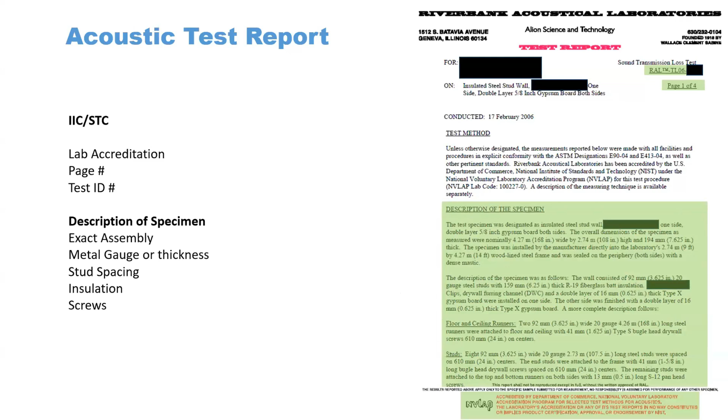Next, even on this same page, we have the description of the specimen. This has things like the stud gauge and spacing, the exact assembly detail, the insulation, even the screw spacing of how the gypsum board is attached will be stated in here. So it gets into a very fine level of detail, and you can start to see the difference in this - it's continued on the next page because it's a bit longer than just this.

So here we can see the insulation, how that gypsum board is attached. And again we look at this, we see page 2 of 4 now, so we're just on the next page. Our test ID number matches, we've still got our accreditation showing. All of this is looking good so far and looks like an actual, good report.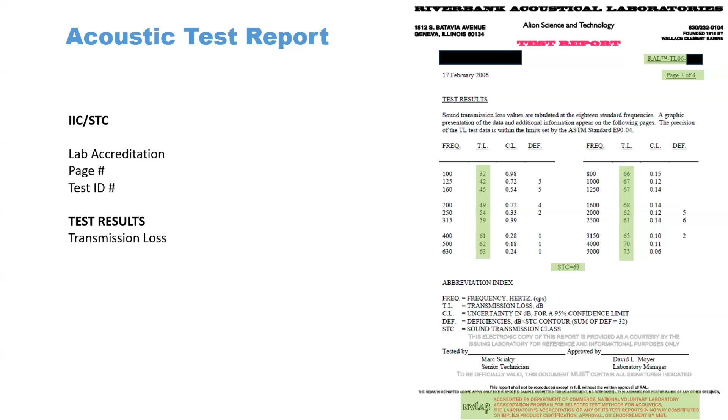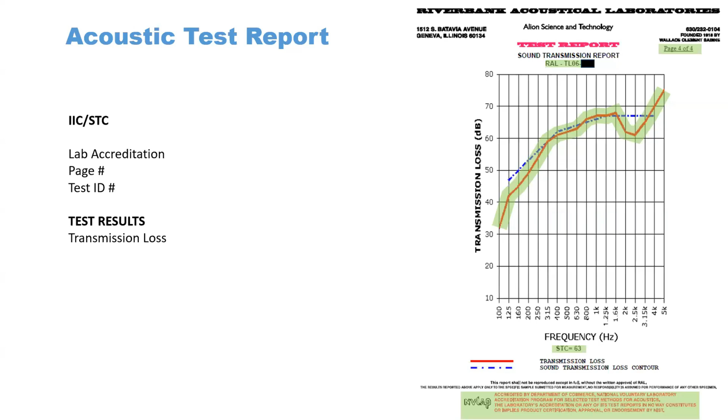It will also have here a graph of this, so you can see how it's performing. The blue line here is the STC contour, as they call it. Based at the 500 hertz frequency is the level that shows you what the STC is, but you're able to be below that contour for up to 8 points at any individual third octave band location, but the total below that curve cannot add up to more than 32. That's how that STC is calculated. So we might have parts that are below this curve, but it might be a different frequency for the same STC rating - we might be above that. And that's how we get that kind of range.

So then again, the selection of an appropriate STC for your wall assembly or your floor-ceiling assembly is really just the first step in the design of the entire sound isolation system, because as we looked at it, it's not just this - it's the entire system. So, next slide.

It's all of these flanking sounds. It's going through the wall, through the door, through where the wall meets the floor, through ceiling spaces. All of these are critical junctures, and every point where this wall meets another surface needs to be investigated to maintain that isolation. So the STC rating is important, but if you don't do all the rest of this, then that STC rating might not be what you think it is.

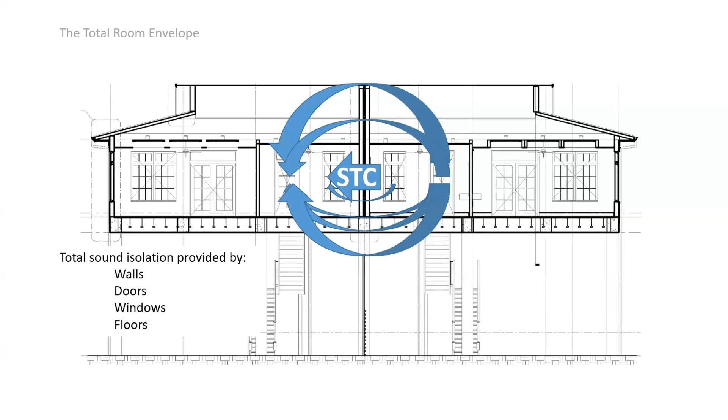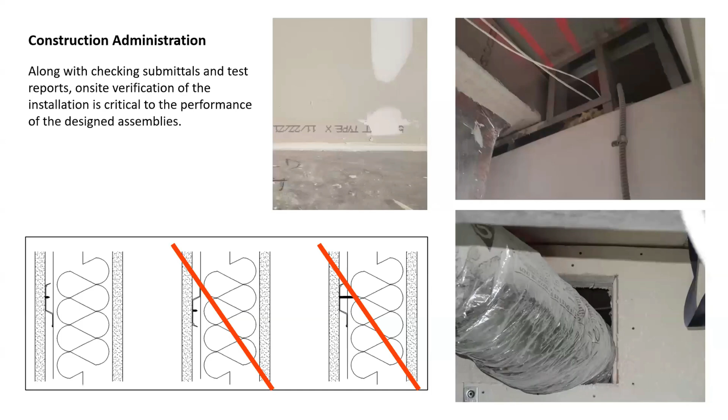So that was part two. We're going to look at a couple more questions for a couple minutes here before we jump into the last part, which is enhanced classroom acoustics.

Marilyn has flagged this question. It says: it seems like meeting code minimum would not meet the standard of care. What STC and IIC would meet the standard of care based on your experience as expert witnesses?

I would say this is highly project and market dependent, meaning what's appropriate for a certain market type, like HUD housing or affordable housing, is going to have different tolerances than if you're designing luxury or ultra-luxury high-rise residences. We have vast experience with the whole gamut. What's expected in luxury and ultra-luxury is much, much different and would require very high ratings. But it also depends—are these going to be apartments or condos? Are they going to be rented or owned?

So now we're going to switch gears a little bit. We've gone over STC and IIC, and now we're going to look at the new code enhanced classroom acoustics requirements. Matt, would you like to start?

Sure. This is actually new to the Florida Building Code as of this edition, the 2023 edition. It's section 1211, entitled Enhanced Classroom Acoustics. It's actually a very short section in the Florida Building Code, but there's a lot more information behind it than what we see.

So it just states that classrooms where this section is required, which is Type E occupancies, shall comply with section 808 of the ICC A117.1. So again, this is Group E occupancies for classrooms. Enhanced classroom acoustics shall be provided in all classrooms with a volume of 20,000 cubic feet or less.

And then when we actually look at the A117.1 section 808, we have a couple different criteria. One is the reverberation time criteria for these classrooms, and it can be done either through a performance method or a prescriptive method.

So the performance method we're looking at is to achieve a mid-frequency reverberation time of 0.6 seconds for classrooms with volumes up to 10,000 cubic feet, or 0.7 seconds for those between 10,000 and 20,000 cubic feet. This would be if you have somebody come to measure the classroom. This is based off of fully furnished, unoccupied classrooms.

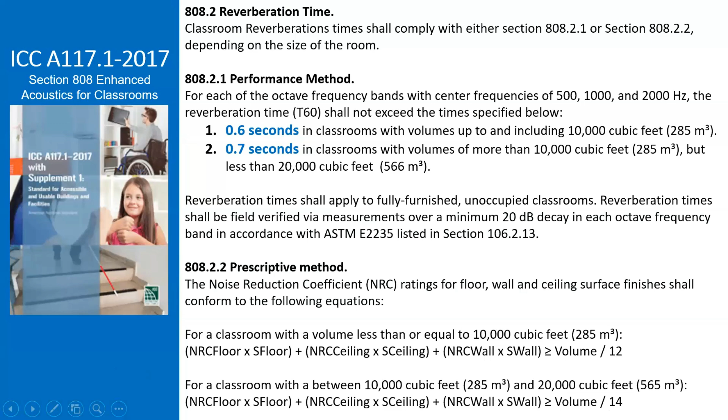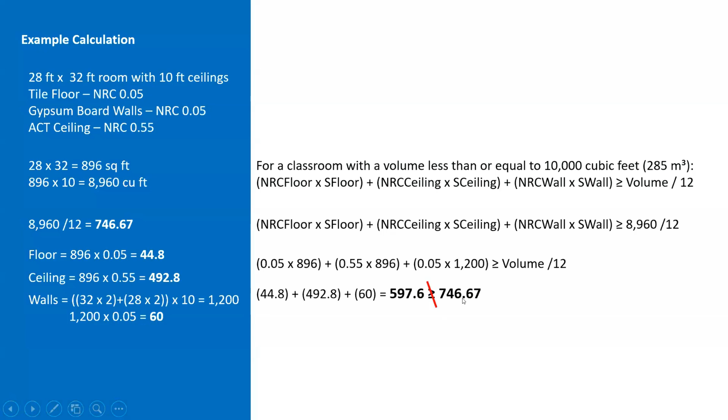So again, the ceiling is doing most of the work here because of that higher NRC. But when we add these together, we get 597.6, which does not equal or exceed the 746.67. So this does not meet the requirement, and we have to do something else.

What we're going to do is change the ACT out for a higher NRC ACT, this one at NRC 0.75. Now we get a value of 776, which is greater than 746. So by changing out that ACT, we can show that this room meets the code requirement.

So we just have to go with that higher NRC ACT in this specific scenario. In others, you can add absorbent wall panels to some area of the walls to help increase that value as well. If you have carpeted floor, it might have a different value than a tile floor. Depending on the layout, you could have a portion of the ceiling as gypsum board and a portion as ACT, depending on whether you have an exterior area with a soffit versus the ACT in the center. There are various ways this can be worked out.

But this is if you're going through the prescriptive method. The prescriptive method does not take into account the furnishings, which you do get if you do the measured value. Those furnishings in the room can help reduce the reverberation time, versus the prescriptive method which is just the building surfaces themselves.

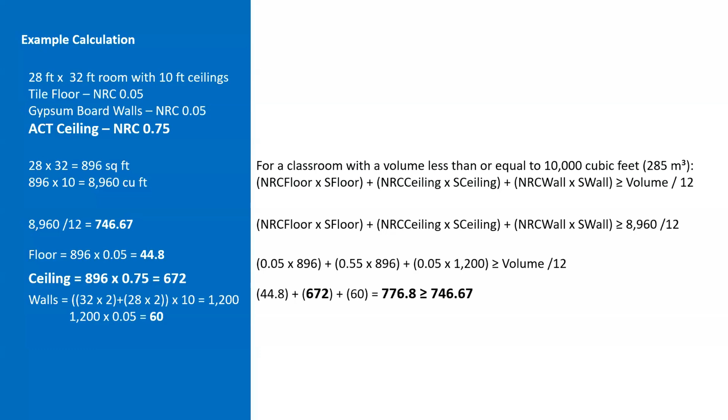So in addition to reverberation time, we also have this ambient sound level verbiage that packs a lot into just a couple of paragraphs. We're going to try to break this down because there's a lot that this verbiage encompasses.

So what this is saying is that basically we have to have ambient sound levels inside classrooms from sound sources outside of the classroom, which would be anything from the exterior. If you're on a site by a roadway, or if there's a chiller plant next to the classroom, or if there's an airport nearby, all of those outside sound sources have to be accounted for when looking at what the sound levels need to be inside.

There is a dBA and a dBc requirement. dBA is an A-weighted sound level, the sound level most people are familiar with. It doesn't take into account the low frequencies, but the C-weighted does, which is why the C-weighted is higher. So basically, the ambient sound level inside a classroom cannot exceed 35 dBA and 55 dBC during the greatest 1-hour average sound level.

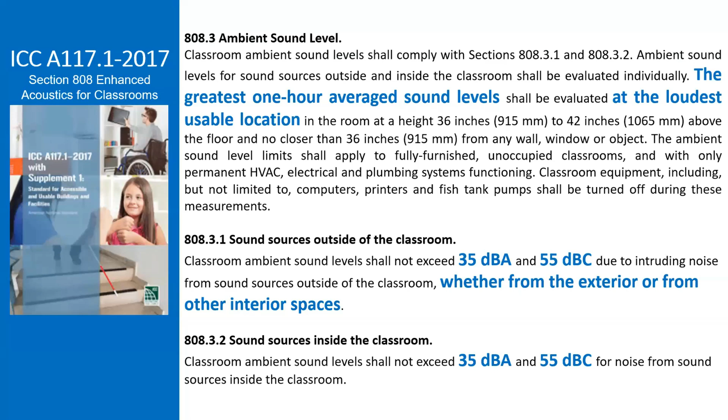But anyway, so as you can see, this ambient sound level encompasses quite a lot in terms of what needs to be done to acoustically analyze how you meet this criteria.

If you're working on an existing building with an E occupancy that's a level 3 alteration, then you do have to abide by the reverberation time criteria. And this level 3 basically applies to where the work area exceeds 50% of the building. So yeah, this only asks then to do the reverberation time. It does not, for the existing building, ask for the ambient noise criteria. But again, for a level 3 alteration of an existing building, the reverberation time criteria must be met.

And this is, so part of the Florida Building Code has adopted this, but it is also from the International Building Code as well, in the latest edition. And so looking at, there is a standard called ANSI S12.60 that has actually been around since the 1990s and is still being worked on today.

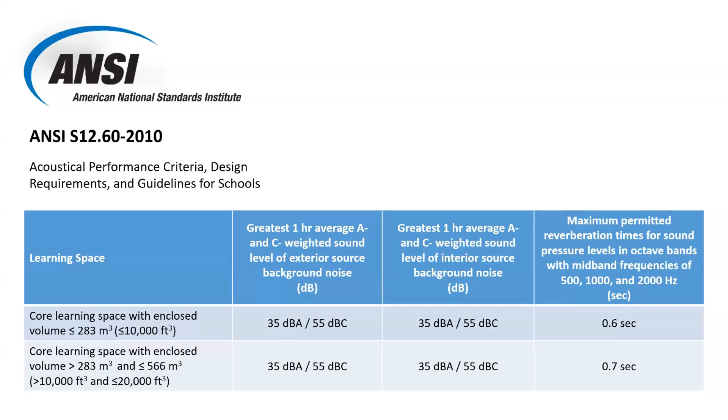I'm actually part of the working group today. Gary Siebein, my father, was part of the original working group for this standard that basically has much of the requirements that are part of now the building code that looks at the learning spaces and what the reverberation time criteria should be and what the ambient sound level should be.

The ANSI standard goes a little further and actually does provide STC requirements for various adjacencies, whether you've got corridors or staircases or toilets, music rooms, offices and conference rooms, and other noisy spaces like mechanical equipment rooms or cafeterias, gym, swimming pool, that kind of thing. And does also provide STC criteria for just any adjacent spaces.